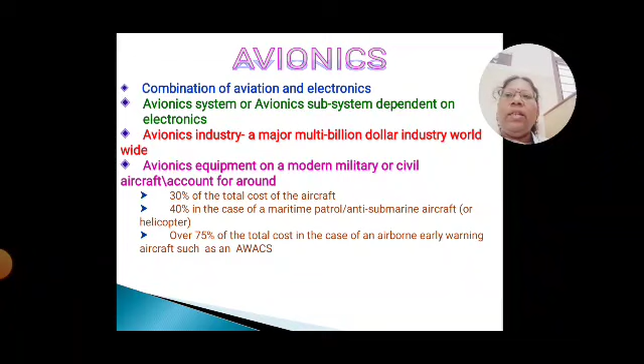What is avionics? Avionics is a combination of aviation and electronics. Aviation means it's a study about the aircraft, the basic concepts of the aircraft that we will discuss in aviation. Then we combine that with electronics, which is called avionics, where we use electronics in the aircraft to control the aircraft. We are using electronic systems, so that is called avionics. It is a study of aviation as well as electronics.

Then, what is the necessity? Why do we go for this avionics system? It is a very big industry, a multi-billion dollar industry worldwide, because most of the amount we spend to design and manufacture an aircraft is occupied by avionics systems. For example, if it is a maritime patrol or anti-submarine aircraft, around 40% of the manufacturing cost is occupied by avionics. And if it is a military aircraft, such as an AWACS system, around 75% of the total manufacturing cost is occupied by avionics only.

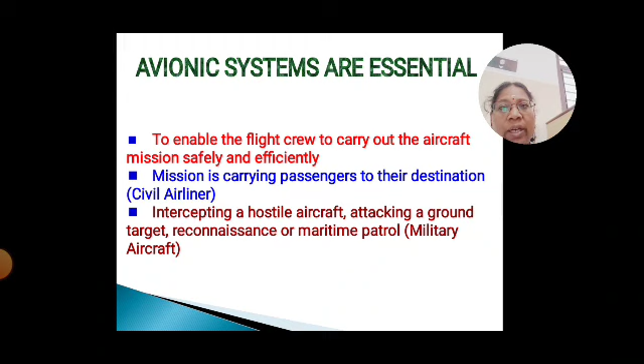Next, what are the essentials of this avionics system? Why should we go for this avionics system? To enable the flight crew to carry out the aircraft mission safely and efficiently. If it is a civil type, what may be the mission? Mission means when you are taking the aircraft, if it is a civil aircraft, we have to carry the passengers very carefully and safely land them at the destination. If it is a military aircraft, it means intercepting a hostile aircraft, attacking a ground target, and then we have to safely reach our target also in any weather condition. That is essential for avionics systems.

What are the major drivers in the development of an avionics system? It's to meet the mission requirements with the minimum flight crew. Suppose if you have a civil aircraft, we know there will be a pilot and a co-pilot. With an avionics system, if a single pilot is enough to control the entire aircraft, that gives economic benefits, since we are saving the salary of a crew member as well as reducing the training cost for another crew member. So we are reducing the cost and getting economic benefits.

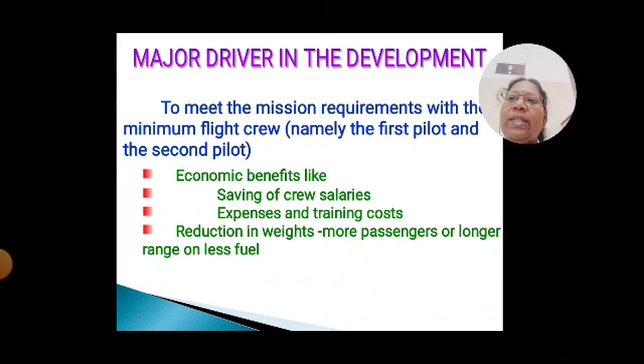Then we are reducing the weight of the flight. Since we are using electronic components instead of mechanical components to control the aircraft, the weight of the electronic components is much less compared to mechanical components. So using that saved weight, we can take more passengers and reduce fuel consumption. That is the major driver in this area.

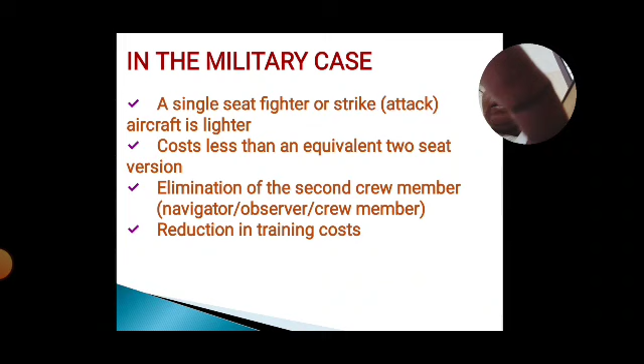Then if it is a military type aircraft, a single-seat fighter or strike aircraft is lighter. Since the weight of the aircraft is light, we can accommodate more weapons, so its cost is less compared to a two-seat aircraft. It also eliminates the second crew, so the second crew's training as well as salary can be reduced.

Next, other important drivers of avionics systems are increased safety compared to mechanical drivers. Here we have an electronic system which gives accurate readings of our circumstance.

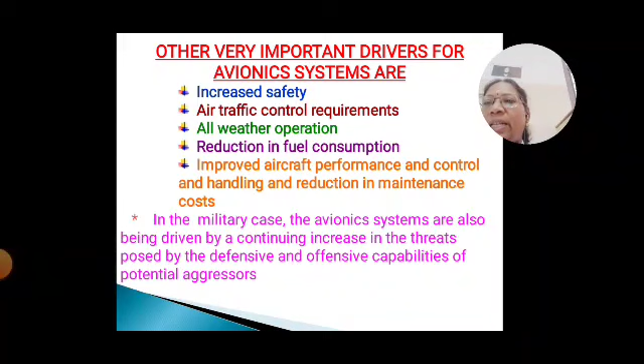So we can safely land, and air traffic control requirements are comparatively less. At any weather condition, you can operate the flight, and it reduces fuel consumption. It improves aircraft performance, control and handling, and reduces maintenance costs. So in the case of military, we can achieve our target, and in the case of civil aircraft, we get benefits like reduced cost and more economic benefits.

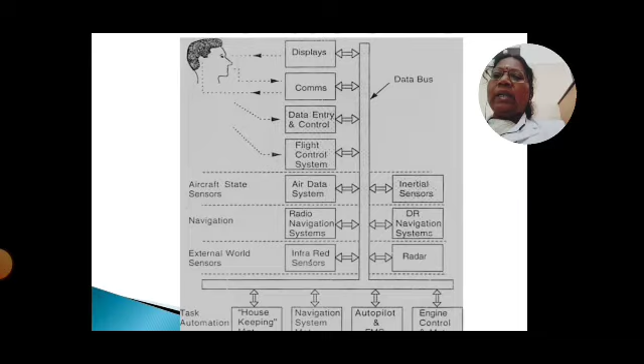Next, we are going to discuss the core aircraft subsystem. Here is the architecture of the avionics system. There is a pilot in front, with a display unit, communication units, and near his hands the data entry and control unit. Then we have the flight control systems. Then majorly we have aircraft state sensors giving air data systems, and inertial sensors. Then we have the navigation and radio navigation system.

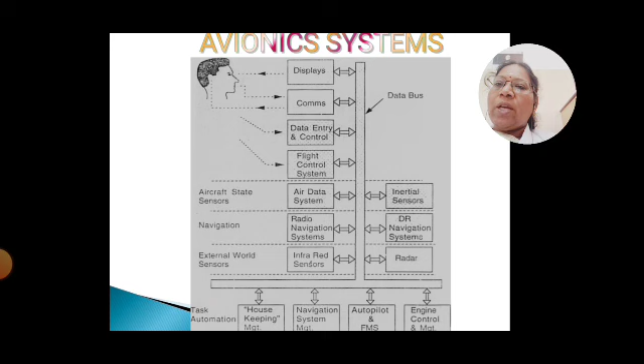In that, especially we have the DR navigation system. Then we have external world sensors that give radar data. Then we have control systems - that is housekeeping system, navigation system, autopilot system, and then we have engine control system. Let me start with that one by one.

The core avionics system is a hierarchical structure. It comprises layers of specific tasks and avionics system functions for enabling the crew to carry out the aircraft mission. When discussing that architecture, we see there are so many layers. First is our display layer, then we have communication layers. So we have so many layers. Let me start them one by one.

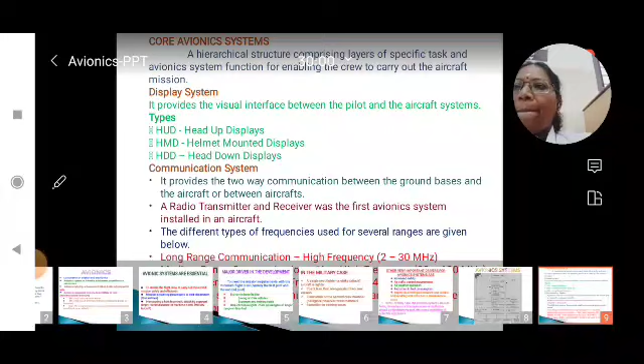What is the function of the display system? It provides the visual interface between the pilot and the aircraft system. Visual interface means we have to get data about where we are and where we have to land. This data has to be displayed in the system. So for that we need display systems. There are three types of display systems: head-up display, head-mounted display, and head-down display.

Next, we have the communication system. It provides two-way communication between ground bases and aircraft, or between two aircraft. So to communicate between two aircraft, we use two-way communication systems. There will be a radio transmitter and receiver in each avionics system. By transmitting messages or radio audio signals, we can communicate with the destination.

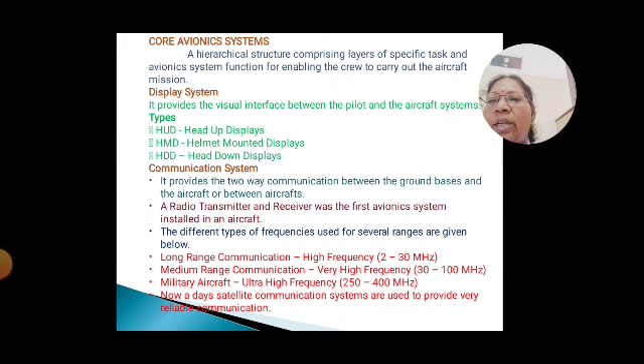The different types of frequencies used for several ranges are given here. For long range communication, as an ECE student you know that high frequency range is between 2 to 30 megahertz. For medium range communication, we have very high frequency from 30 to 100 megahertz. For military aircraft, we have ultra high frequency range from 250 to 400 megahertz. Nowadays, satellite communication systems are used to provide very reliable communication.

Then the next unit is the data entry and control system. It is essential for the crew to interact with the aviation system. So to give commands or to receive data, we need the data entry and control systems.

Then the flight control system. It uses electronic systems in two areas: first is auto stabilization, then fly-by-wire or flight control system. Auto stabilization means once you start from land, you have to stabilize the aircraft, then control the aircraft towards the destination. So that is controlled by this flight control system.

Then we have the aircraft state sensor system. This is a sensor system - you already know the uses of sensor systems. Here we have the aircraft state sensor systems. It is used for control and navigation of aircraft. Air data quantities are essential.

To control the aircraft, we need data quantities like attitude, altitude, airspeed, true airspeed, Mach number, vertical speed, calibrated airspeed, and airstream incidence angle. These are all data we need to calculate the destination and where we are now. That can be calculated with this data, which is collected from the aircraft state sensor system.

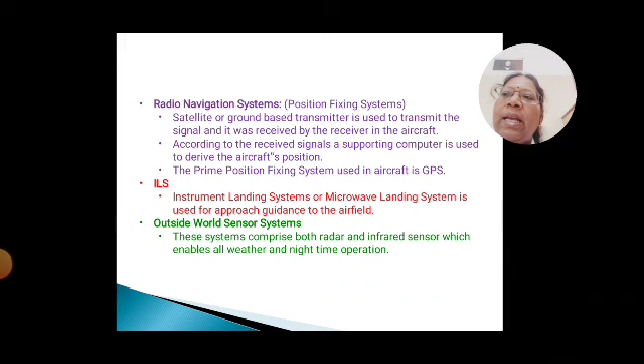This system comprises both radar and infrared sensors, which enable all weather and nighttime operation. Using radar, we can obtain data about objects before us, and using that we can receive data in all weather conditions and at nighttime also.

Next, inertial reference system. The aircraft attitude and the direction in which it is heading are provided by the inertial sensor systems. Using that system, you can obtain data like the heading direction, where we are moving towards, as well as the attitude of our aircraft.

Next, navigation system. The navigation system provides navigation information like position, ground speed, and tracking angle. For that, we are using dead reckoning system or position fixing system. These two are the systems to calculate the altitude and position of your navigation system.

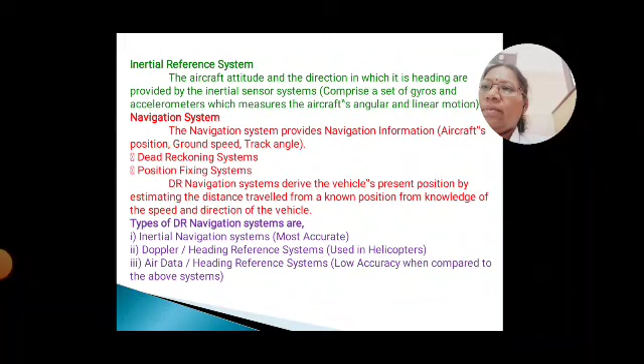Then types of DR navigation systems. Mostly we go with the DR navigation system, especially the inertial navigation system, which is the most accurate system. Or else, based on requirements, we can use Doppler or heading reference systems, mostly used in helicopters, or we can go for air data or heading reference systems. Compared to our INS system, these have very less accuracy.

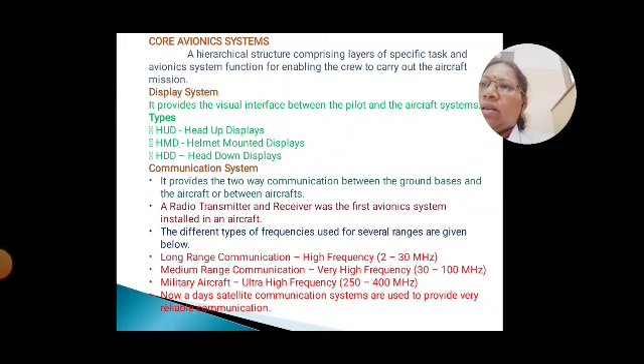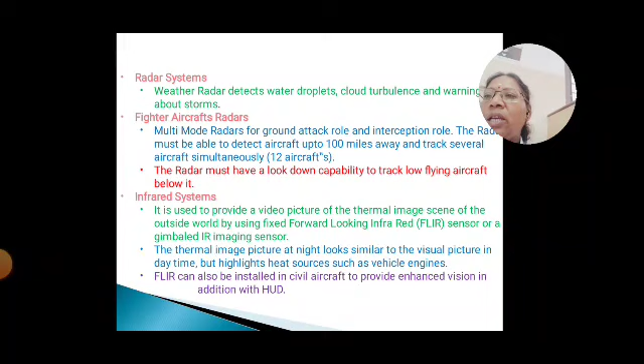For fighter aircraft, multi-mode radars are used for ground attack and to detect interception of other aircraft within 100 miles, so we can find how many aircraft are surrounding us with these fighter aircraft radars. The radar must also have a look-down capability to track low flying aircraft below us. This is all the radar system we are providing.

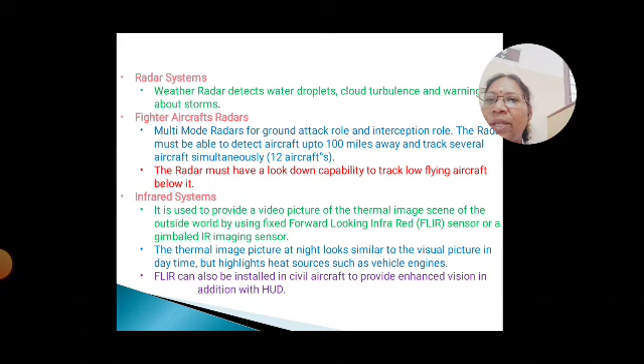Then we have the infrared system. It is used to provide a video picture of the thermal image scene of the outside world, using fixed forward looking infrared sensors or gimbaled IR imaging sensors. Using these sensors, you can identify, based on temperature conditions, what objects are available there.

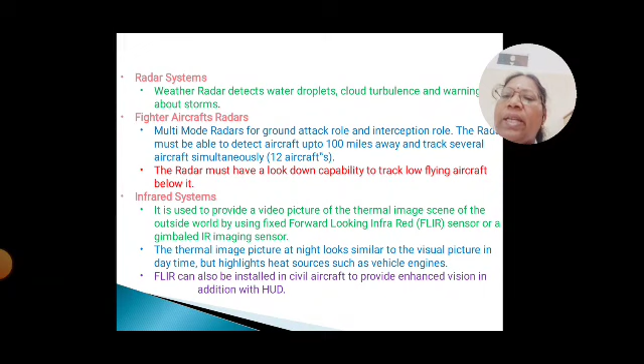The thermal images at night look similar to the visual picture in daytime. Using this, we can get more data, deeper and more accurate data.

Next, the task automation system. Task automation systems reduce the workload of the flight crew. Automatically, if you go with the autopilot system while flying long distance, once you fix the destination, the flight will be under autopilot mode, so the flight workload will be reduced.

Then the navigation management system comprises the operation of all radio navigation and a combination of data from all navigation sources such as GPS and INS system, and it provides the best estimation of the aircraft position and ground speed. By calculating the best position and the best destination route, we can make an accurate decision.

Then autopilots and flight management systems. The autopilot relieves the pilot in long range missions. The flight management systems came into use from the 1980s itself.

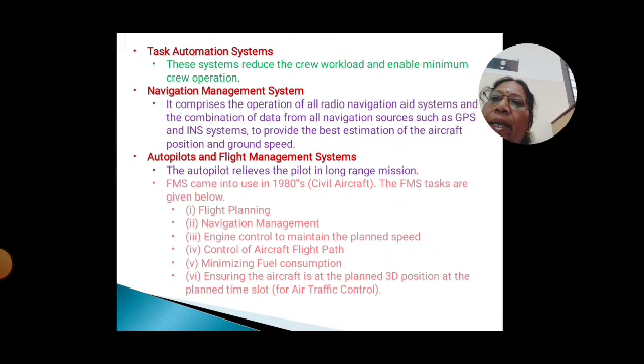They provide flight planning, navigation management, and engine control to maintain the planned speed, then control the aircraft flight path, minimize fuel consumption, and ensure the aircraft is at a planned 3D position. These are all the uses of your air data control system and flight management systems.

So far we have discussed all the core avionics architecture. Let me start with the next topic in the next unit. Thank you.